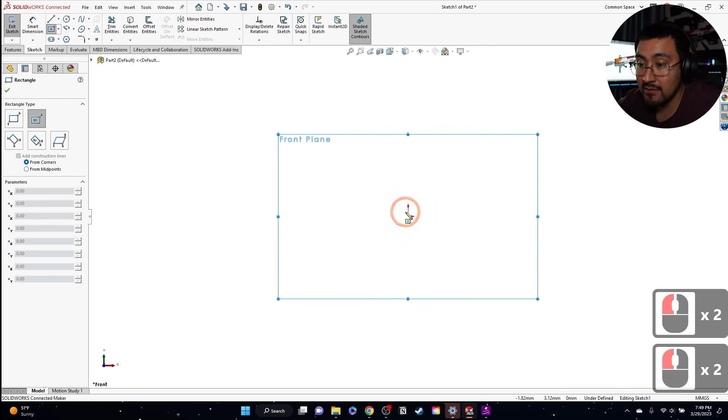I'm going to start with the front plane, and I'm going to do a center box. 96, 64. And it's going to be an extrusion of 20. Not up to body. Do a blind 20 millimeters. Press OK. So right click here.

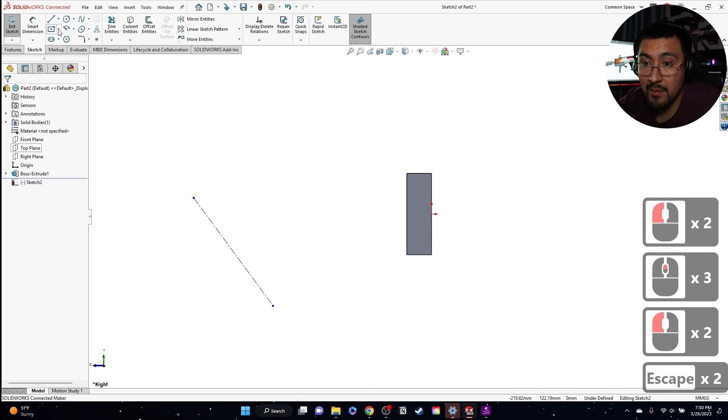Here to here. And what I'm going to do is I'm actually going to grab a rectangle here. I'm going to do the rectangle here. Make this parallel to your line. Parallel. Make it at 45 degrees. And bounce to the other side. That's fine. Oops.

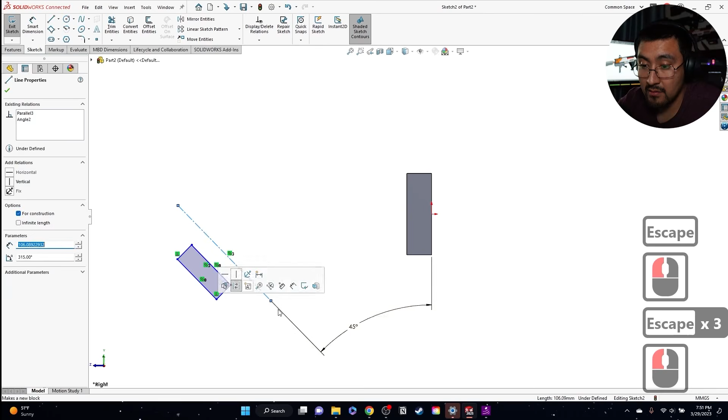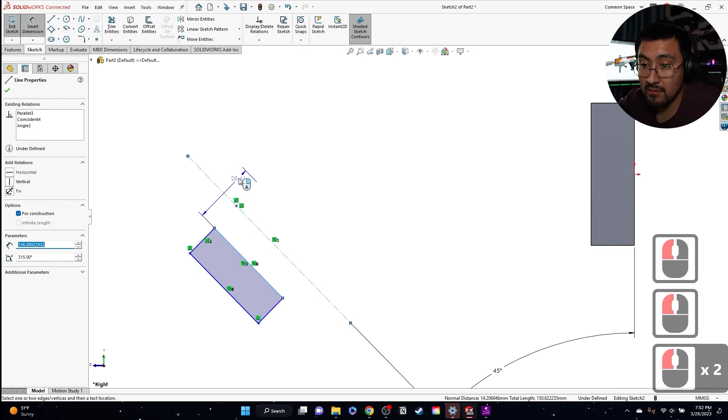And then let's give this some dimension. I think they interpret the center. I'm going to put a dot here. Make it coincident with this line to be the center. Let this technically be the shell of that cylinder there. So the inside is going to be 32. And then 52 on the outside here.

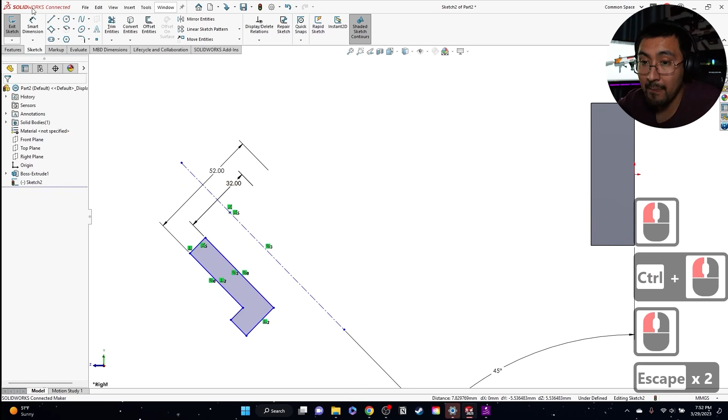I'm going to grab another rectangle here. 2 points. It's going to be parallel to that. And then I'm going to snip it off here. There we go. And then let's remove that edge and just combine this. There we go. This one down here. 64. There we go.

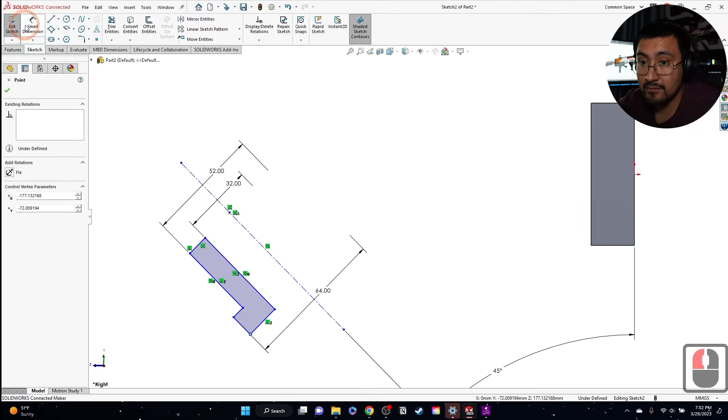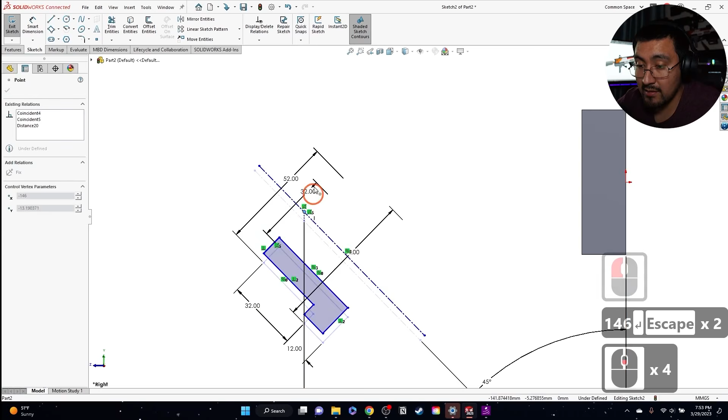And then it's going to be 12, 32, and I'm going to remember this 146. This dimension here is going to be 12. This dimension here to here is going to be 32. And then this center to here is going to be 146. And then looks like I still need one more dimension to completely define it. So it's going to be here to here, and it's going to be 64. Perfect. Now I could revolve this.

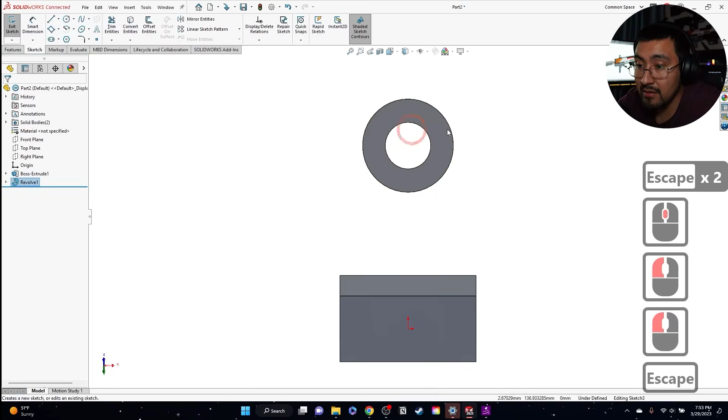Revolve. It's okay. I'm actually going to do something here. I'm going to go to this plane. I'm going to grab a line and put a line right through the center here. And I'm going to right click here, toolbars. Oops, sorry, tabs. I'm going to go surfaces, and I'm going to do a split line. And I'll show you guys why I did that later on.

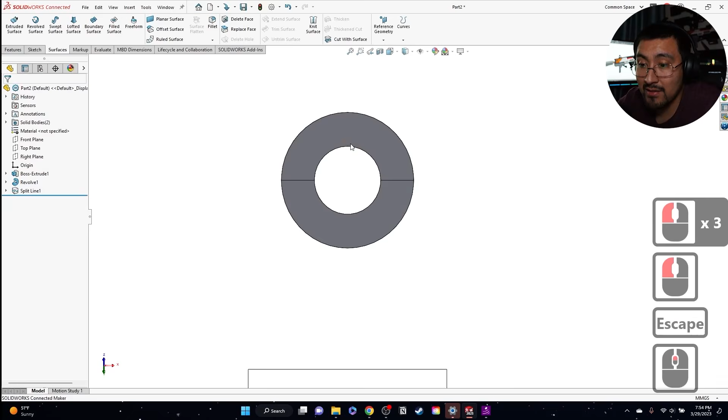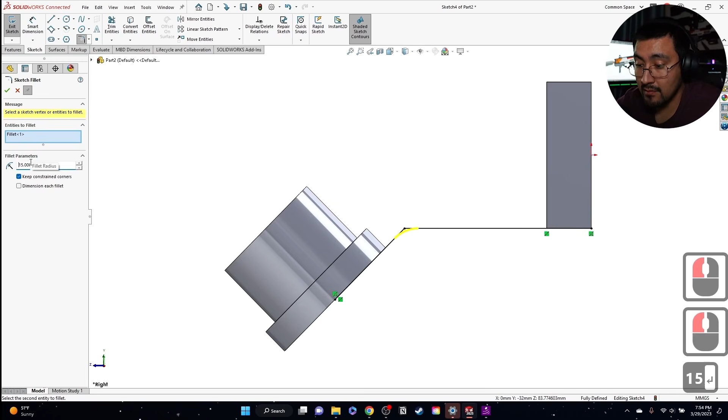Let's go right here. And then it looks like I'll grab the center here. Make this collinear. Make this collinear. Collinear. 15. So right click, select chain, offset, reverse. We'll put the 12 here. Delete this. I'm gonna make sure this is lining up with this. So if I were to change that 12 to this flange, then it'll change the entire thing.

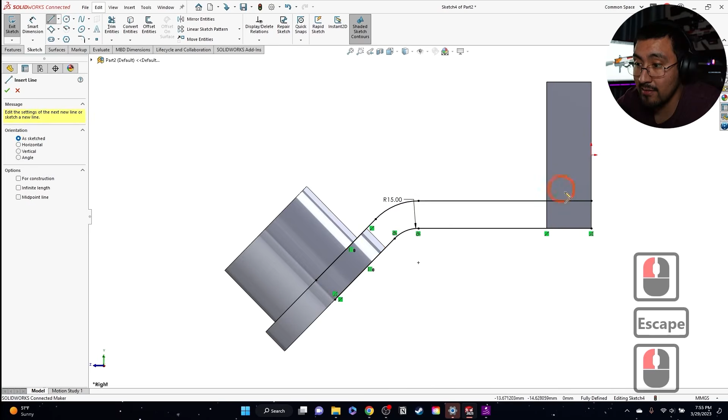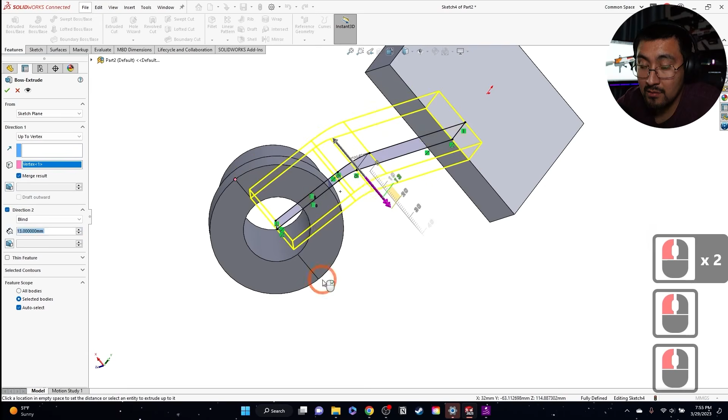Grab this point to here, this point to here. And I'm going to do extrude boss. And this is the reason for the split line. It gives me a point here, so I'm going to do up to vertex. And then a second direction up to vertex. Oops. And what this does, it basically ties all this information, except for that radius, to that second sketch we did with the revolve. So if I were to change this in the future, this would all change.

And basically that gives it intelligence, that makes it cool and fun. And if somebody were to see that, or like for me, my boss saw that, they get amazed, like, oh my gosh, you did that so quick. And it makes you quicker as a designer. It gets me giddy thinking about it.

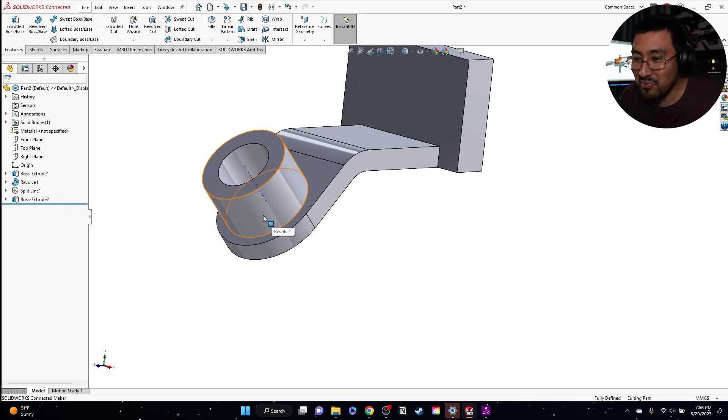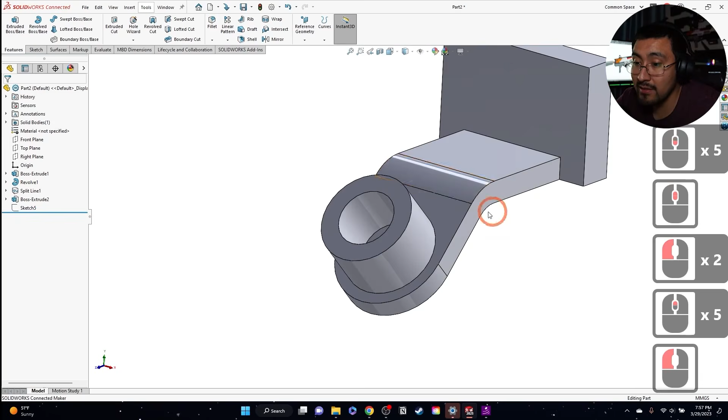So, okay, next part. So I'm gonna right click here, here, and we're gonna offset this 26. And, oh, yeah, I forgot about that. Let me go back a bit. Actually, this is perfect right here. I could teach you one more thing. Before we go through that sketch right there, to make sure that this piece is continuously a through hole, we could easily go here, extrude cut, and all that.

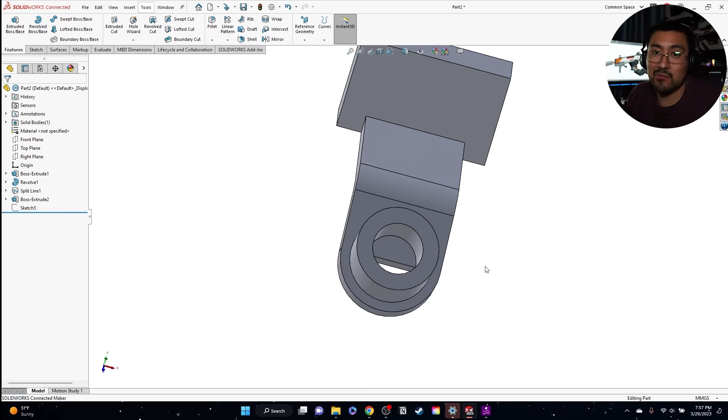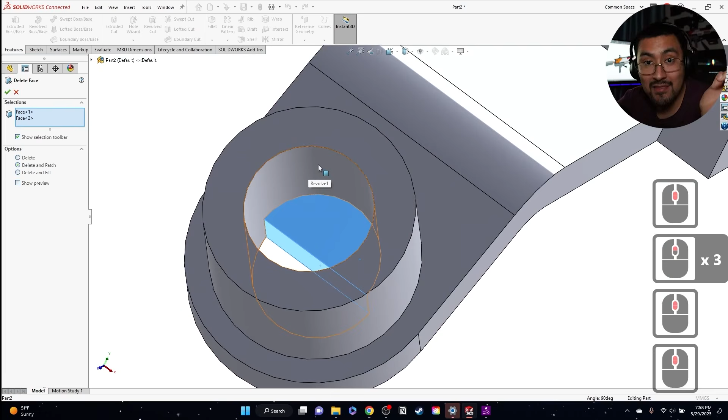But let me teach you one of my favorite, most powerful tools that I've seen in SolidWorks. I remember I had a professor and he's like, I don't even know how this works, but it works sometimes. So we go to, sorry, not evaluate, I believe it's Insert, Face, Delete. We could click these faces inside. And it's going to delete the faces, and any of the connecting faces will basically fill in. So this face will fill that space in. And that'll be the delete and patch.

If I were to do just a delete, it will delete them and make this into a surface body, which we don't need right now. And delete and fill will kind of fill it in, but in a not so sophisticated way. It'll be almost like a dumb fill, but it is useful for other things. But for this situation, we want the computer to merge all those faces together.

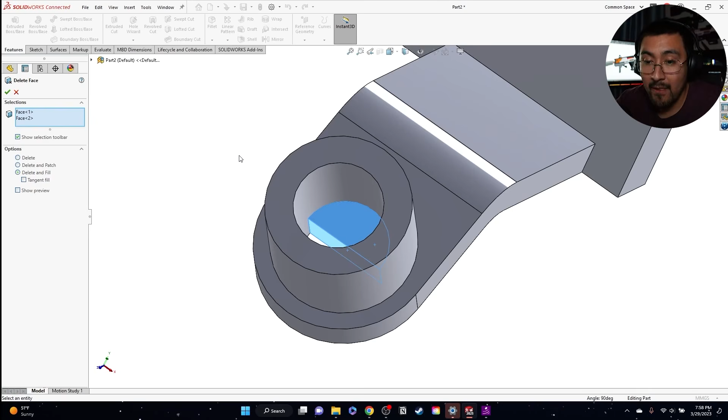With the delete and fill, it'll leave those lines there and kind of fill it at the closest points possible, if you get what I mean, almost like a loft. But for this one, delete and patch basically merges these faces together continuously, and I love that. Now we're gonna take this sketch number 5 and drag it down underneath the delete face.

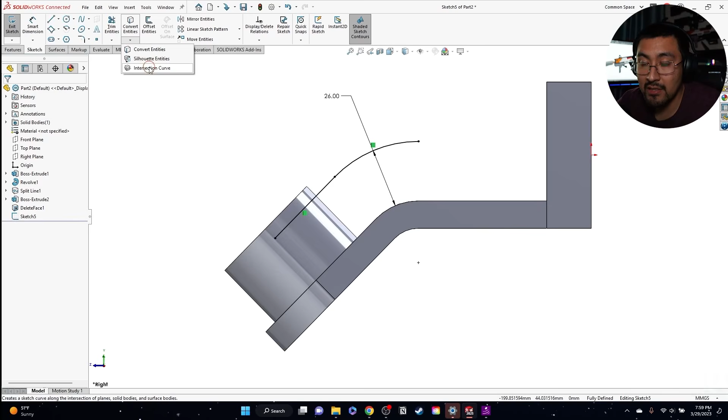Now that we're done with that, I'm gonna sketch here. The reason I want to do that is I want to do a convert entities, but I want to do an intersection curve, and this basically will give me this line in here on the center. There we go. You see that? It gives me that. So when I do the extrude boss, it won't cut in like it did before on the previous extrude. I'm just gonna trim it up, and then escape here.

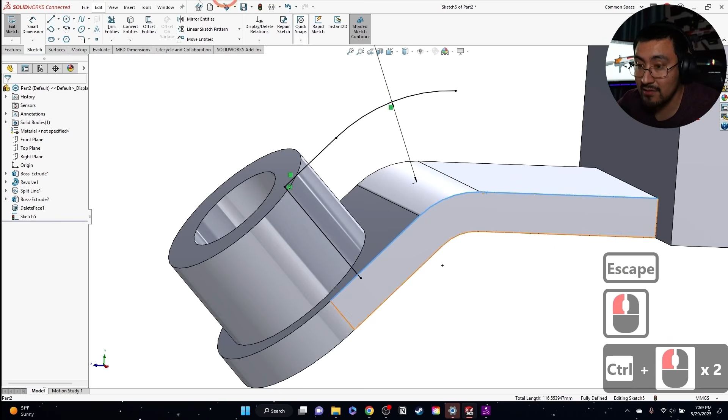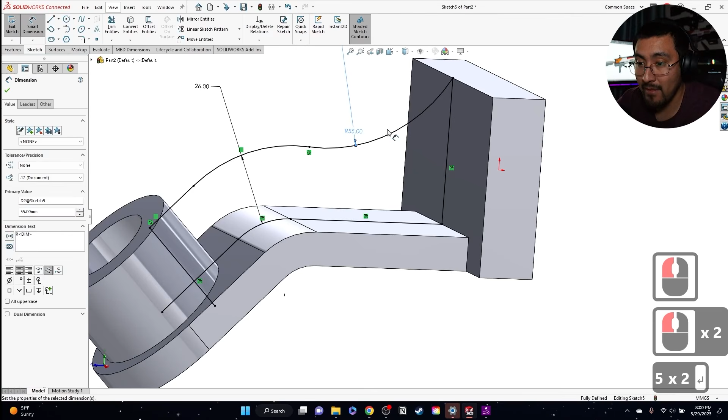Grab these pieces of sketches. I'm gonna also grab this one here. Convert entities. Trim this edge here, and now there's that radius. What I'm gonna do is a tangent arc, and I'm going to go up to this point. And the interesting thing about this is that it's almost anywhere. It doesn't declare it, but it gives you a measurement of R55, radius 55. So it defines it for you. And then we basically go up to this point. Nope, I forgot right here. Let me trim these up.

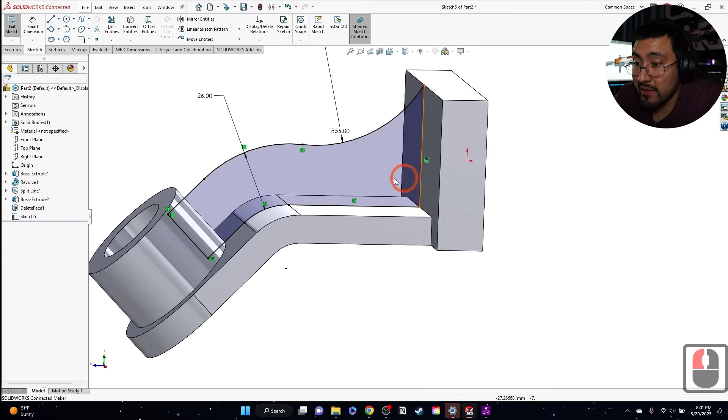The thickness for this rib. Oh boy, and I can't quite find it. Does that mean I have to go to the solutions video again to find out the answer? Because they don't have it here. I'm gonna extrude it to make sure I get the results I want, and we could go back to it. I'm gonna mid-plane it, and I'm gonna do it by 10. Merge result. And there we get the rib.

Grab the hole wizard here. Instead of standard, for our standards we're gonna go to ANSI metric. And we're going to go to this image here, which is the counterbore. We're going to go socket head cap screw. That's the most common screw out there, socket head cap screw. We're going to go to M6. And this one is going to be through all.

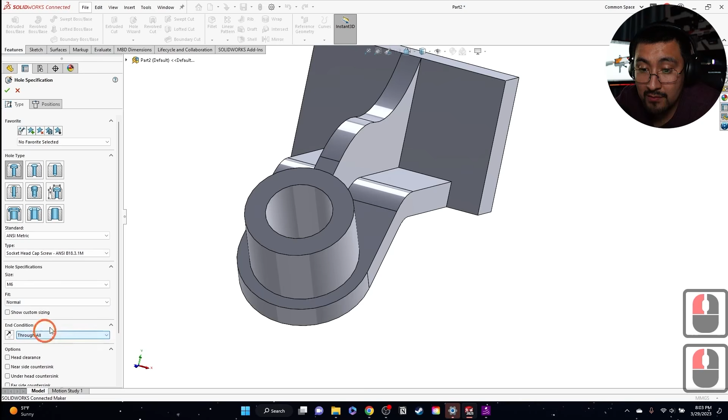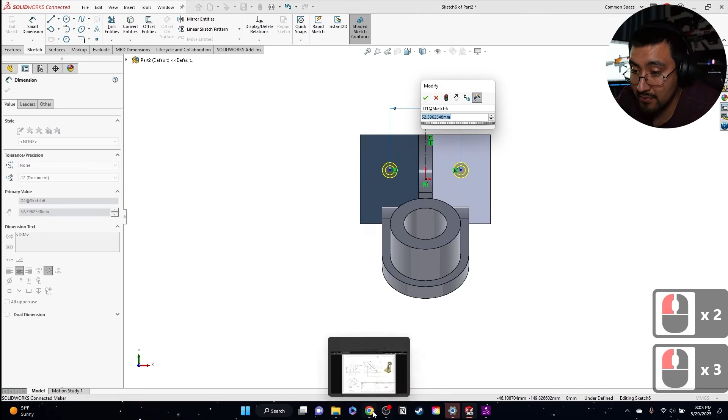Make 2 here. Actually, what I'm going to do is a center line. I pick the face, put down a center line. I'm going to grab this point and mirror it about the center line to make sure they're mirrored. I'll make a dimension, and that dimension is, that's a good question. I'm gonna type 60 in. So right here it's supposed to be 18. We could leave that as reference.

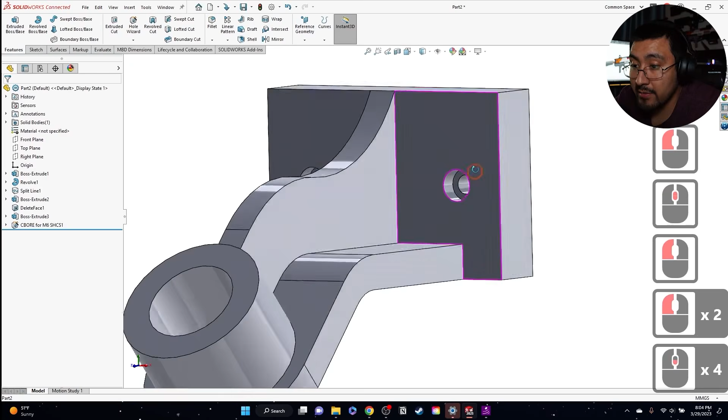And from here, is it the top that way or the other way? I'm pretty sure it's this way. 32, let me make sure in the drawing. 32 from the top. Yep, and then let's press OK. There we go. We have our 2 M6 counterbores. So the R2.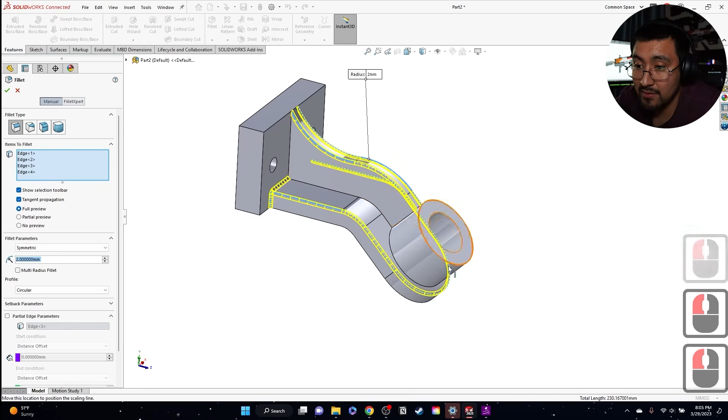So let's grab the radius tool. I'm going to click this line. Click this line. All the way around. Almost as if it was a casted or a plastic piece maybe. Oops. I'm going to have to do those in another one. Let's grab this wall too. And then this one, I can't grab because of this edge right here. Sometimes it just can't do it. So here I'm gonna grab these.

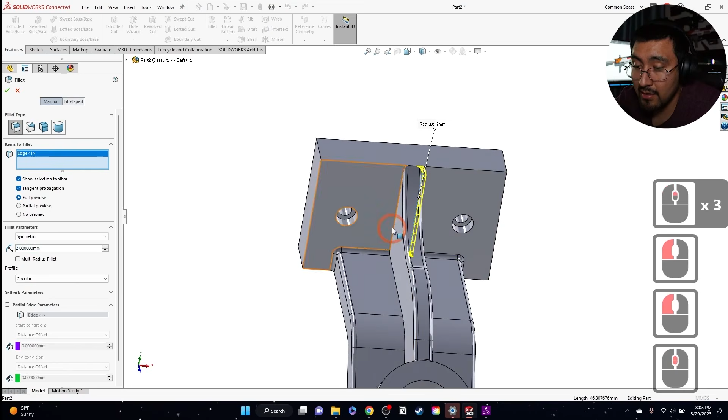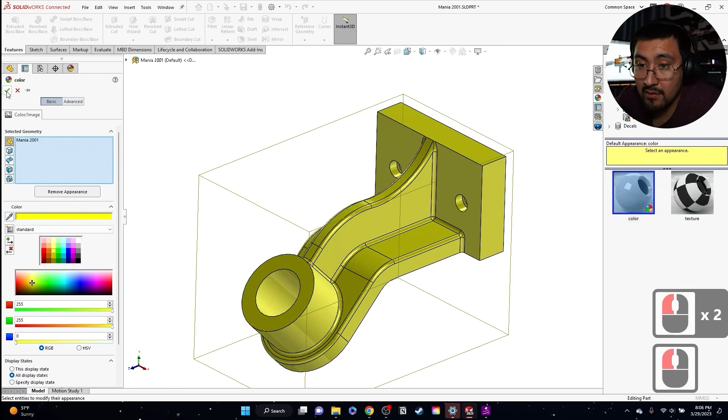I'm gonna grab the fillet tool one more time, and now I should be able to drive those. And actually, this one right here, I'm gonna remove, and now it gives me a smooth transition for the second time. There you go. Goes all the way around this time. Perfect. I'm gonna color code it the same way. Just add a color. I'm just gonna highlight those radiuses all at once and color them this nice red. You guys have noticed that red. And then I'm gonna remove the shader. It gives you a nice little part there. I like that. Let's save that.

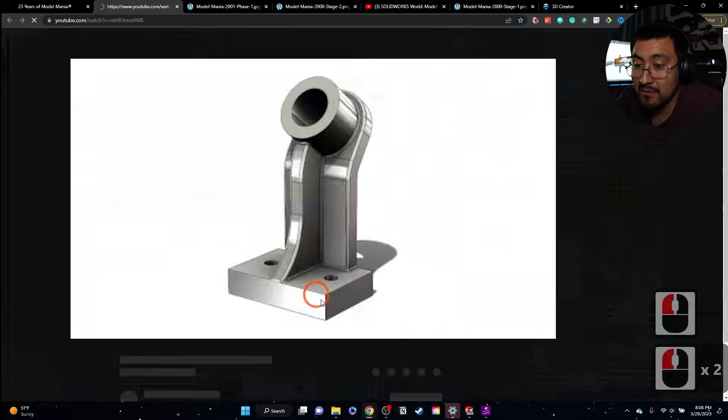I only wish I knew what this rib dimension was. And you know what we're gonna do? We're gonna go to the solutions video and find out. Oh, he did the rib tool. I probably should have done that. So that was 12 millimeters. Okay. And we're gonna click 12. There we go. Now it's all up to date.

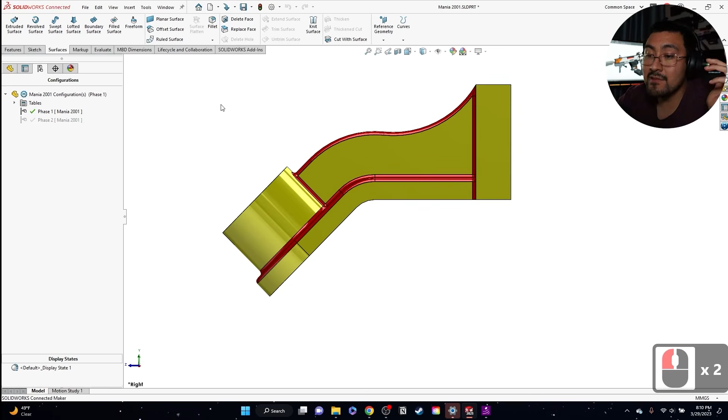And this time, let's not forget about the configuration. So we're gonna go here. We're gonna call this phase 1. And I'm gonna make a new configuration, phase 2. Now, if you guys didn't know, configurations are a useful thing in SolidWorks because they allow you to have 2 designs or more in one part.

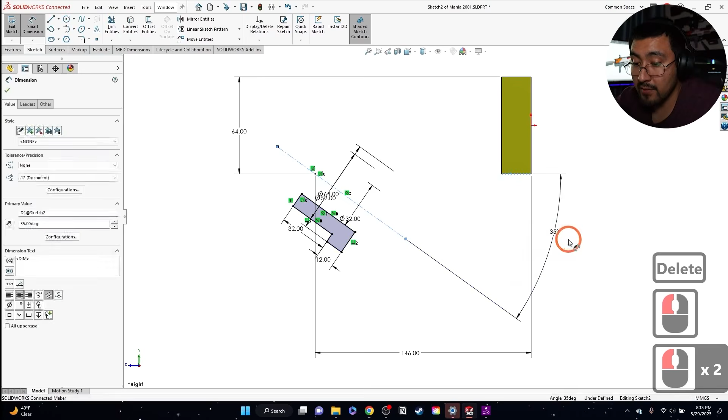Oh, I see. The dimension actually changes. If I go to phase 1, 45 is from here. So I actually made a mistake. So instead of like that, here to here, 45. Okay, great. Then this configuration is going to be 55. This configuration, I'm going to change to 45. Control Q. Okay, there we go.

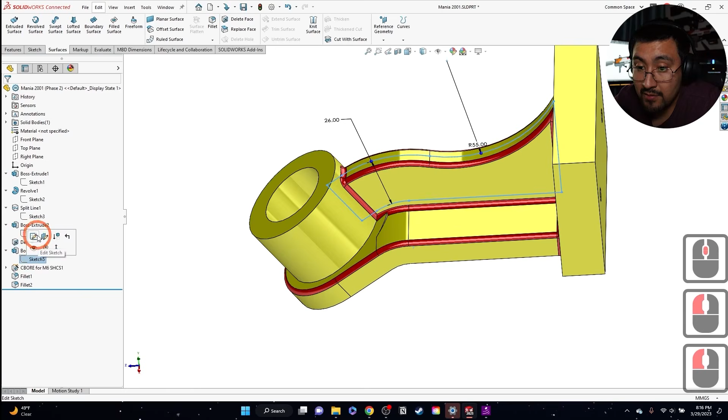Now, you see this curve? They want it flat now. So I'm going to go here. I'm going to have to break that for a bit. Go flat. Make that tangent. I'm going to just hit this point so I don't have to do the trim. And let's do a tangent arc up to this point.

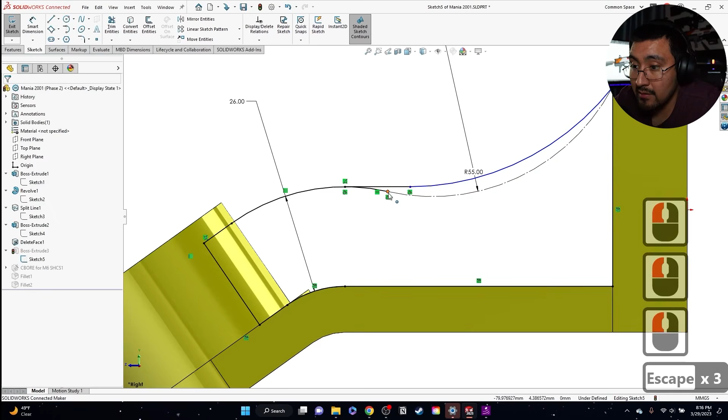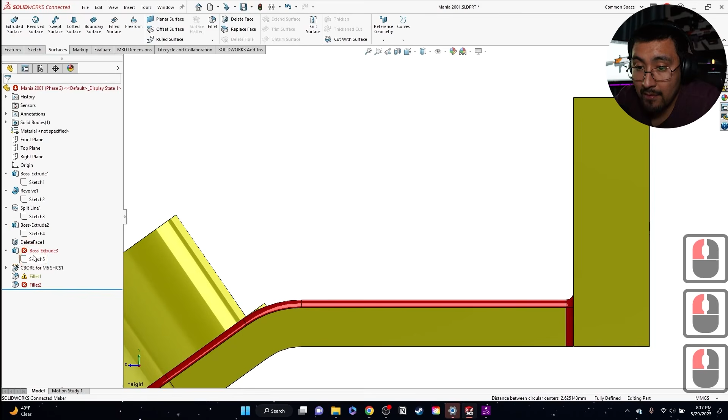And hopefully it's the same. Oops. Make these equal. Exit the sketch and rebuild anyways. And I'm going to grab that entire thing in there. There we go. My fillets are going to be all messed up now. There we go, there we go. Make sure I fix all the fillets.

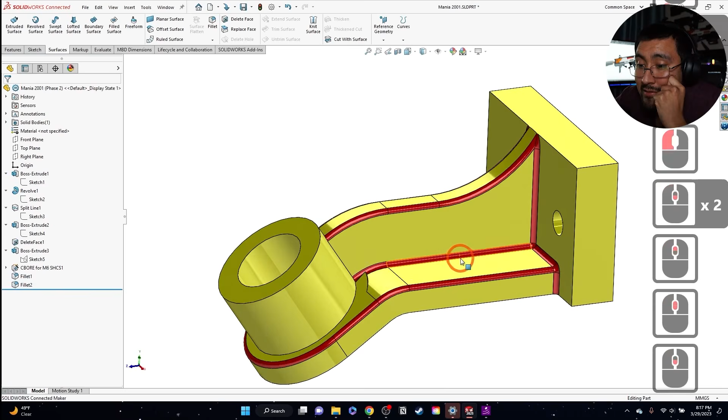Now, the one thing I don't like about this is that straight line actually makes this different. Oh, actually, I forgot about that. Let me get that out of the way as well. And then this right here, this is a messy way of doing this, which I'm not a particular fan of, but it was the only way I could think of to get around this.

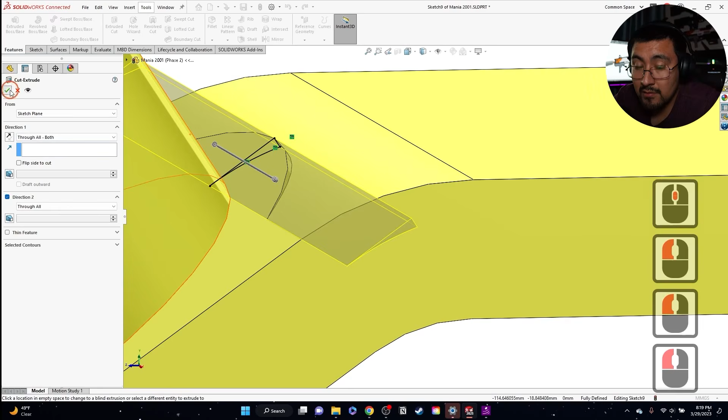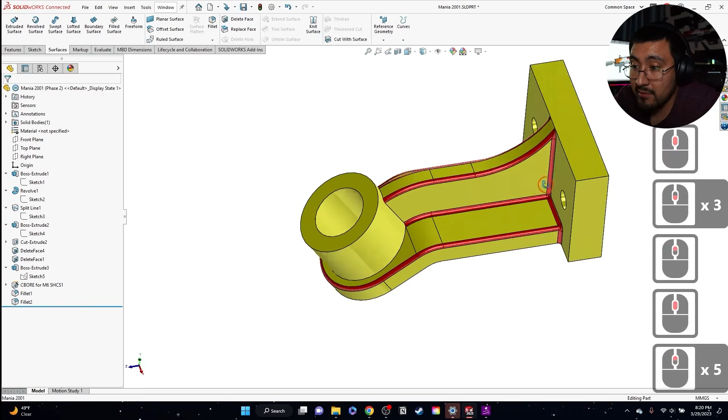Through all both. Cut. Maybe better to do a section view. Do the right plane. That little bit right there is what's going to give us issues. There we go. Delete face. Now it combined it, so we're not going to see that issue again. Scroll down. And we're missing a couple more radiuses. So I'm going to go here. Actually, I'm going to go to this first one. Add in the radius right there.

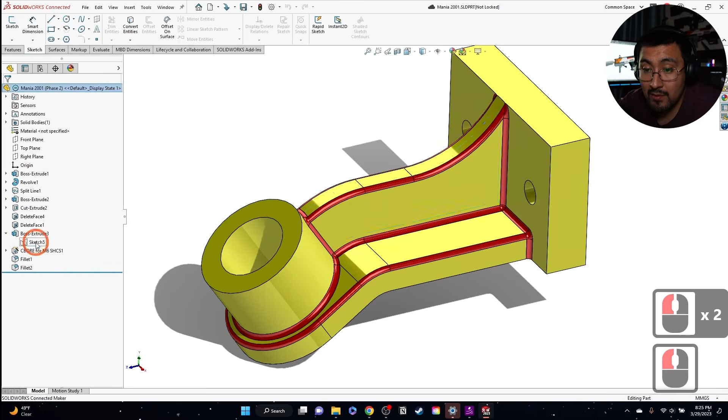The question would be how to get both of these versions configurable, especially because this straight line makes it difficult. So what we could do, I think I know. So right here we do the extrude boss, and we're going to do a selected region. That's fine. So what I'm going to do here is go back to the sketch. And there's 2 versions of this sketch. You see that? So I'm going to make sure this line is not a construction line anymore. And trust me, that's going to break a couple things, but that's fine.

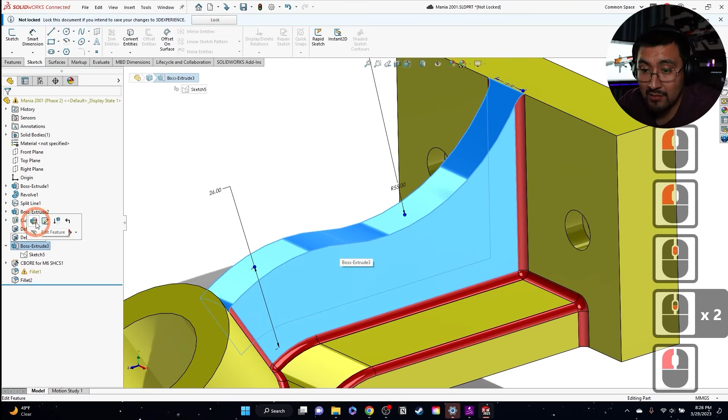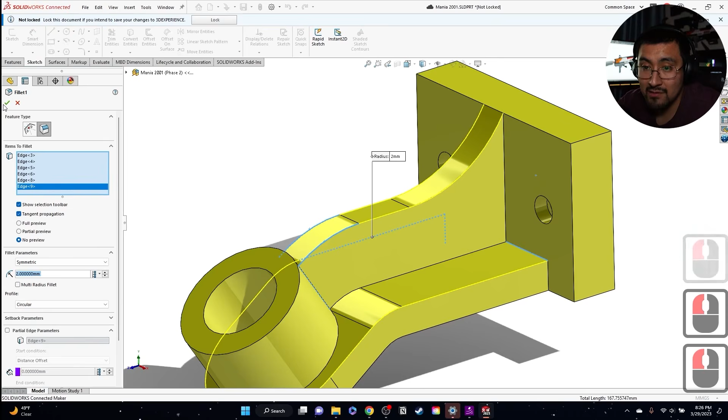And what we'll do is that this extrude boss will add in the region, which will be this side right here, which will fix all of these sketches, or all of the fillets. So right here, we selected these up here. So instead, I'm going to select something that stays consistently rather than these edges here. I'm going to select this edge, and this sticks all the time in both configurations. That fixes that. I'm going to save that.

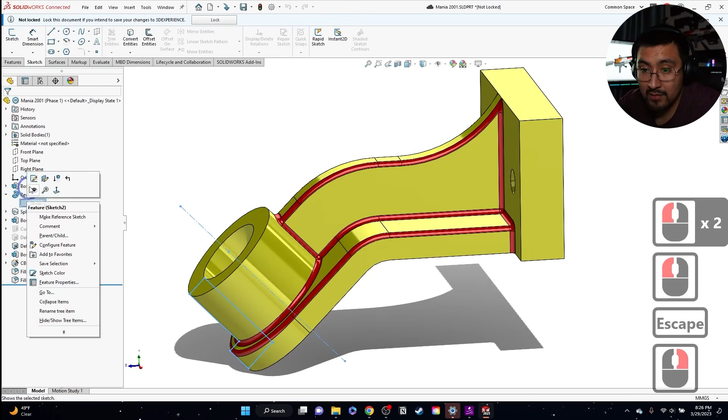I'm going to head over to phase 1. There's going to be a lot of stuff that's broken, and that's fine. Actually, less than I really thought, honestly. Oops, I don't want to edit the feature, I want to edit the sketch. So that's 64, 146, 45. So that is correct. And right here, we're going to go this configuration only. And I don't know if this works, honestly, but I'm going to delete this.

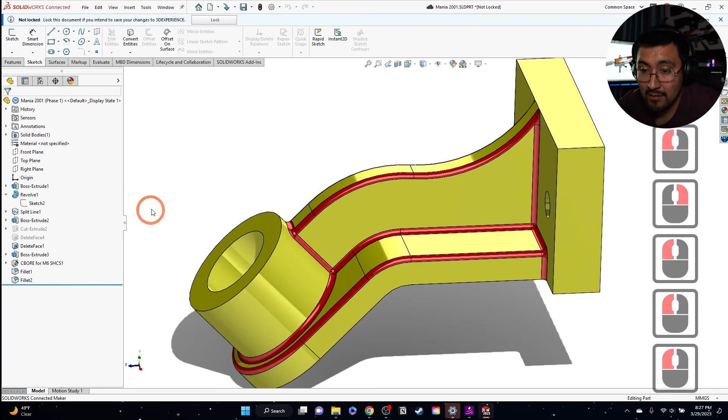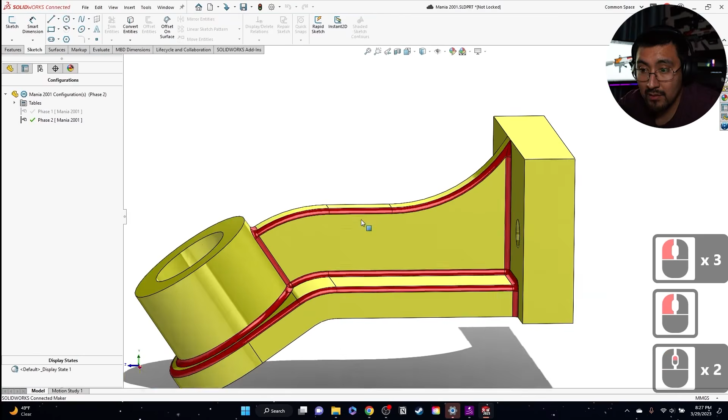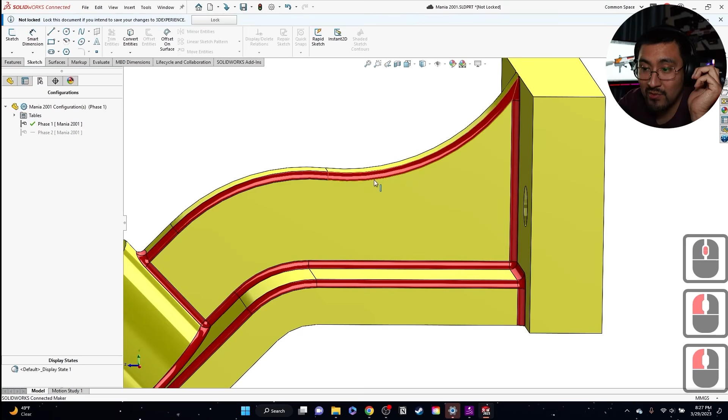Okay. So just to summarize real quick, what I did is in Boss-Extrude, I have technically two sketches here, 2 regions, and you can select between the 2 regions. So in phase 1, I selected the one region that has this lump that doesn't have that straight line. And then in the second version, in that Boss-Extrude, I added that region, and now I could get both regions. So technically now we have both versions in the same drawing, and now we have 2 different configurations. Perfect. I'm going to save that.

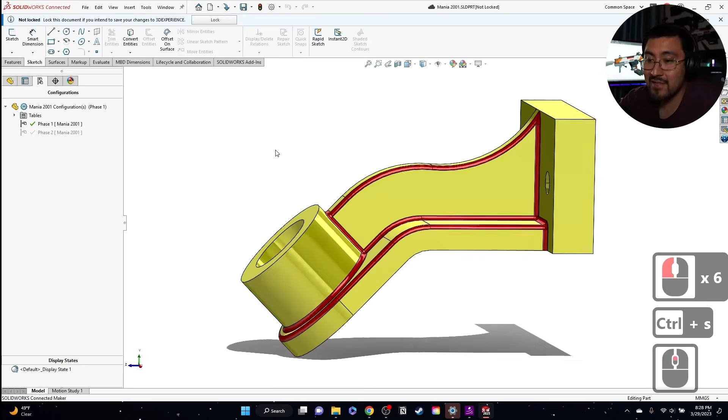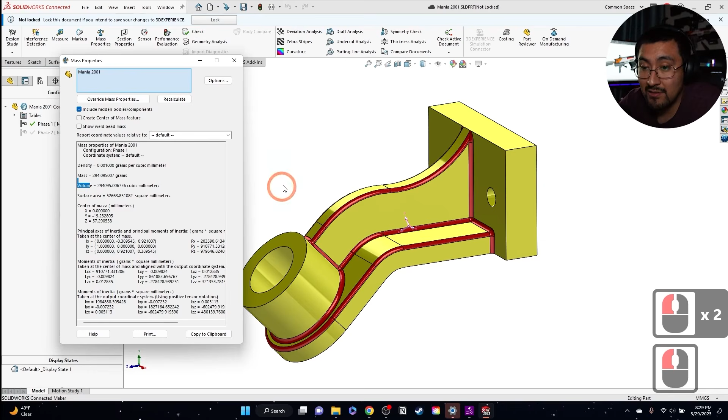You can see here from my volume, well, you could use the mass too, but the masses may differ between systems, especially if you have a material on there. So just use the volume for now. It's the same thing. You can compare the volumes. This is huge in a number, but just compare that against yours, and that's for phase 1. And let me go to phase 2 properties, and then here's the other volume.